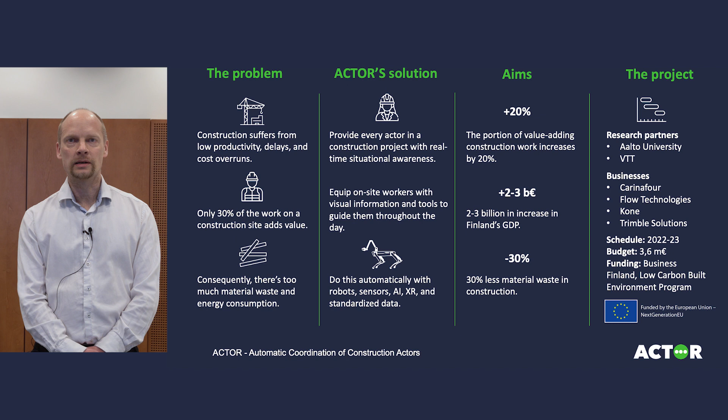Our approach is improving real-time situational awareness by using tools like robots, sensors, AI, XR and standardized data. The solutions you are going to see today from the company partners include solutions related to logistics, smart elevators, and recording site flow, scheduling systems, and solutions related to robotic automatic data collection. In addition to this, we have a lot of research coming up, but we will have separate events to discuss our research results. Welcome and enjoy.

Could we reach the same level of material management as the shipbuilding industry? Ari Viitanen of Carinafour explains how to automate the material management workflow with their CALS platform.

In the ACTOR project, we research and develop further our CALS material management platform. So if we looked at what CALS is actually about: first, in the first box, we are collecting the construction material part lists. We can take it from the BIM model or we can take it manually from other sources. So there we are getting this space-specific part list.

Next thing is that we are connecting the part list to the schedule, so work planning or the project planning. After the second box, we have the scheduled part list, which is actually demand. It means that we know what materials are needed, when they are needed, how many are needed, and where they are needed.

Okay, now we move to the third box where we are doing the supply chain integration. There we are sharing the forecasts, running the material call-offs, and getting the material confirmation from the network. After the third box, we know that we have the material availability.

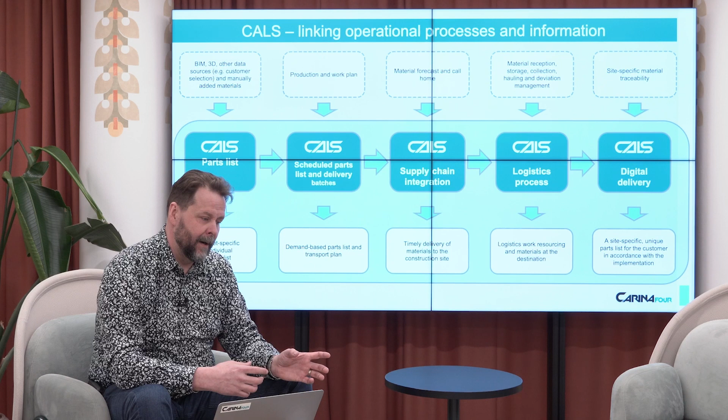After the materials are delivered and everything is installed, we have collected the deviations and run the continuous improvement. So after the whole process, we are able to do the digital delivery. This means two things: we can deliver to the asset owner which materials have been used in the project and in which locations, and we know the process, how we have delivered, how we have defined, how we have run the logistics. So we have this as-built logistics model as well, and from the logistics process model, we can utilize it to further develop the whole process.

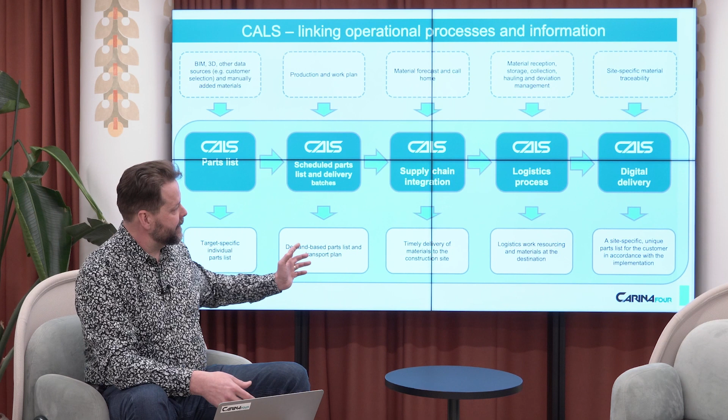In ACTOR, the main focus was how to automate the information sharing. Today, we are doing all of this with emails and telephone calls, and the digitalization utilities - how we are using the digitalization - it's a very low level today. But in the future, time to time we still need a telephone or emails...

...but the idea is that the material management will be on a digital platform, we have the data, how to develop the system further, how to be better tomorrow than we were yesterday. And that was the aim: standardize, stabilize, automize. And that's CALS 3.0, what has been researched and developed under ACTOR. Thank you.

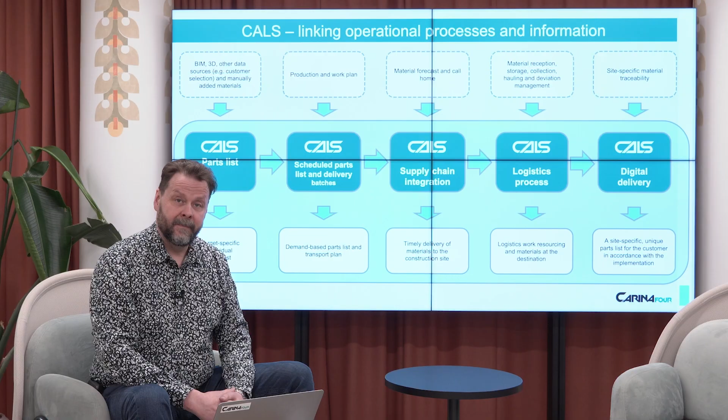How could elevators be used for construction management and optimization? Let's watch a video by KONE about SiteFlow, a digital platform providing that capability, and then Ulla Tikkanen will elaborate on the benefits of the solution.

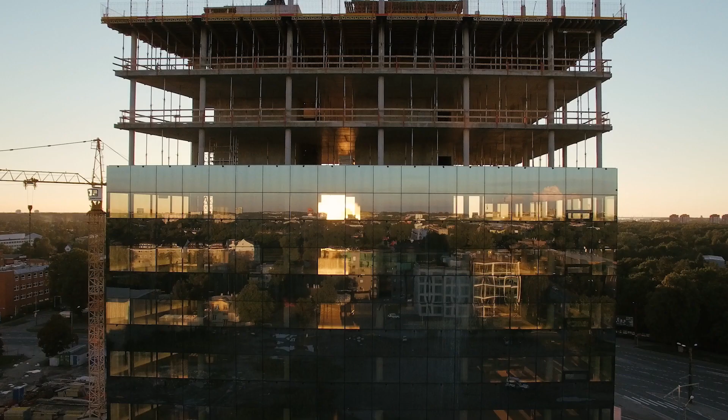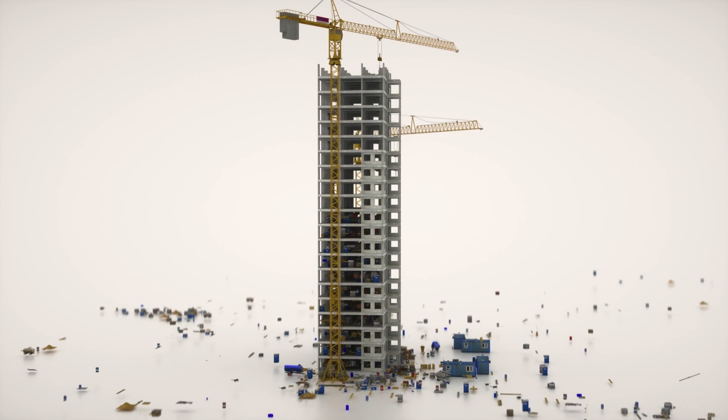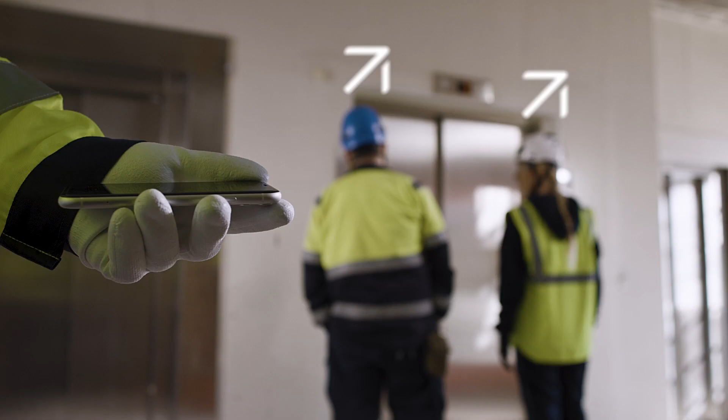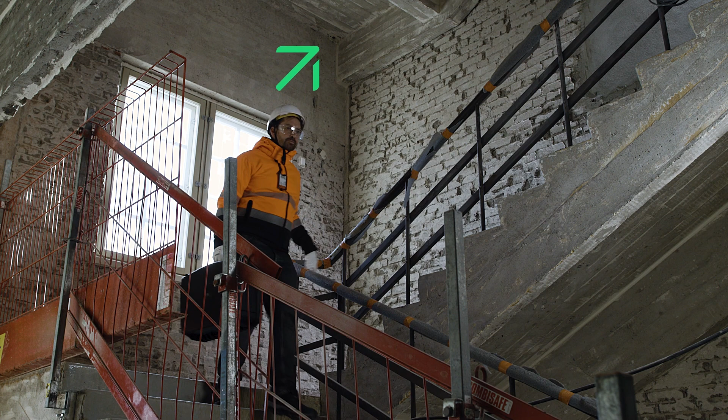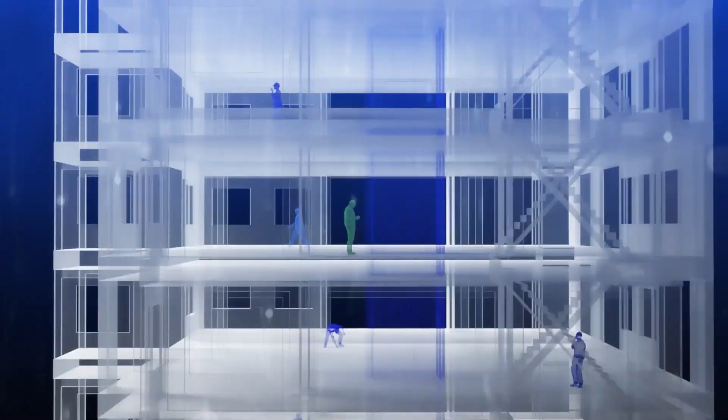Get up and go with KONE SiteFlow. Manage and monitor your elevators remotely - that means instant insights anytime and complete control anywhere. Permit or limit floor access in line with the latest on-site developments. You can even prioritize the elevator for the most operation-critical workers, allowing them over 4 times faster service. Quickly identify and fix any issues with the help of AI and real-time notifications. Share information and updates with everyone via the KONE SiteFlow app.

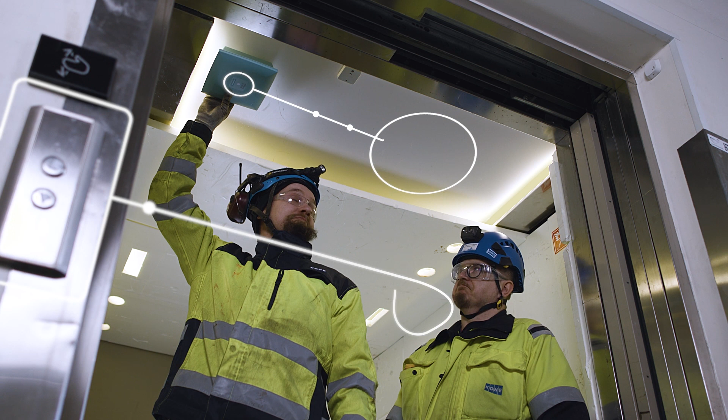Get people and materials to the correct floor with minimal hassle. So, how does it work? We use RFID data to enrich elevator, people and material flow data, combined by advanced AI technology. Over time, KONE SiteFlow calculates how to best optimize the system for your site's specific needs. The installation is simple, requiring only helmet tags. Attach, scan and go - we'll handle the rest.

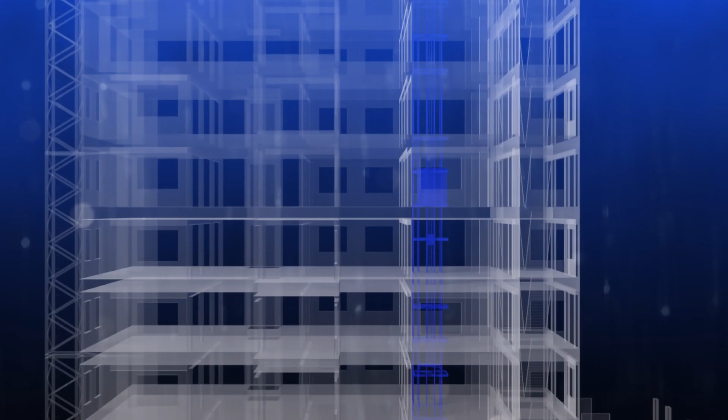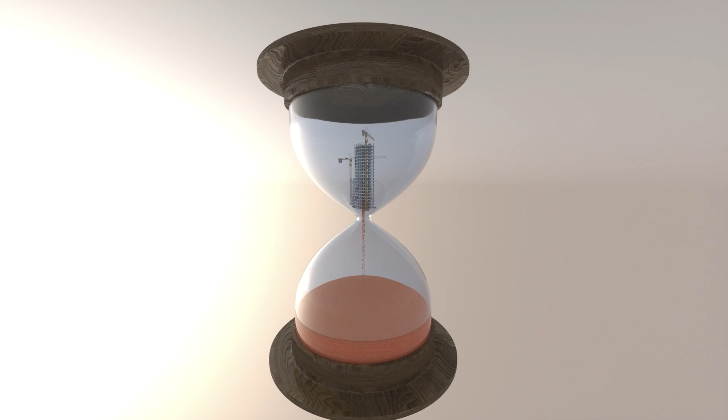KONE SiteFlow provides actionable insights to increase site productivity. It equips you with the tools to fully control elevators during construction. Detect and react to minor issues before they become major problems. With its help, you can cut back on the productivity cost of all the little moments lost. A 2-minute delay here, a 5-minute wait there, adds up to hours upon hours across the lifespan of a project. And that's just for one single worker. KONE SiteFlow, giving your efficiency the lift it needs.

To conclude and to align with actor goals, I would like to mention four things. By integrating KONE construction time elevators as part of your vertical site logistics, you can save up to 46K per month per elevator by moving workers and materials faster.

Secondly, our digital solutions can help maximize elevator logistics capacity, both KONE elevators and traditional construction hoists. According to studies conducted with our partners, digital tools can significantly reduce time spent looking for tools and equipment.

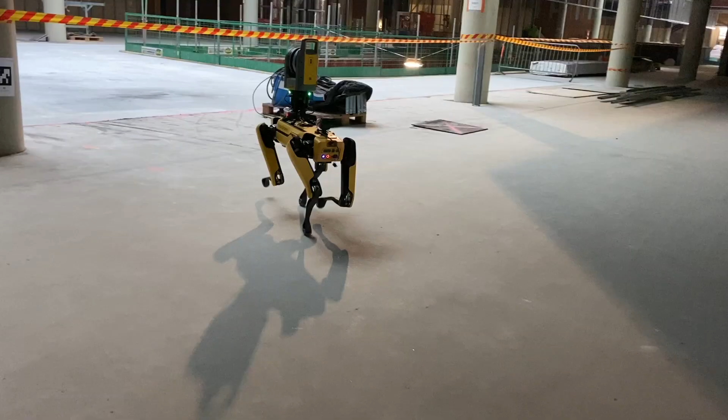One of the use cases for robotics in construction is data collection. Kim Nyberg of Trimble discusses automated data collection and digital collaboration boosted with robotic technologies. For the last couple of years we have been working on the Actor project, trying to get robotics into work sites. Trimble has been focused on automated data collection.

We have been using the Boston Dynamics Spot robot, which we have equipped with 360 cameras and laser scanners, LiDARs, and so on. We also developed remote operation software for remotely controlling the robot using a web interface, which means we can control a robot anywhere in the world just using a browser.

In Finland, we have been focusing mostly on the construction industry, and our international tasks have been focused around mining. Another aspect we have been working quite heavily on is real-time collaboration.

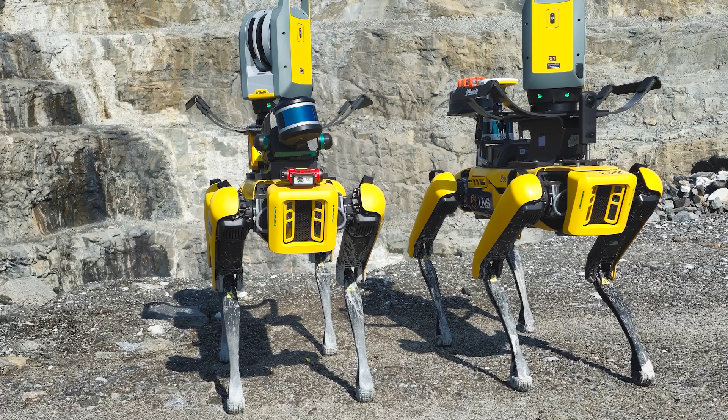Once we get the data from the field into our system, into Trimble Connect and Tekla Structures, we have enabled something called Trimble Live Sharing as a backend solution and live collaboration, which allows for real-time collaboration around the model, avoiding meetings to talk about clashes and instead solving them in real time. Of course, these changes can then be sent back to the field as well.

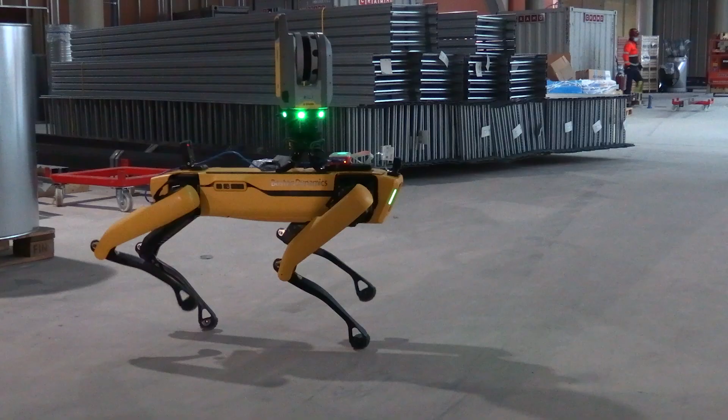One of the many things we have done is utilizing GNSS, that is GPS hardware, so that we can plan missions outdoor using Trimble Maps. An operator can sit at an office, plan a site visit, and then anyone who can drive a car can take the robot out on the site, press a button on the mobile phone, and the robot will autonomously walk the predefined mission and collect the data, either using 360 imagery, LiDAR, or point clouds.

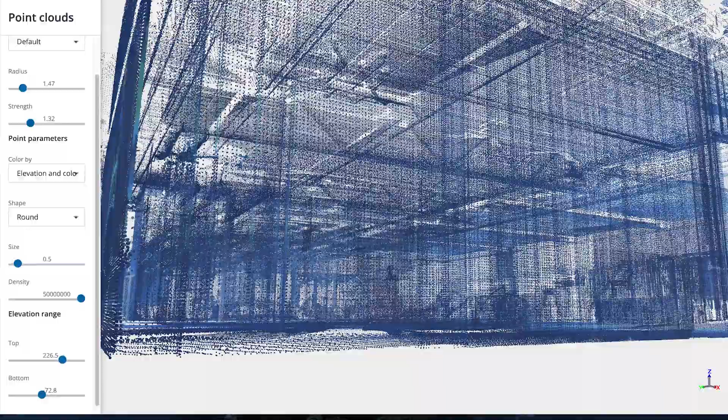Once it's in Connect, we have software that can automatically classify the material, align it automatically, and from that we can do modeling either based on the point cloud or automate the process. This enables automatic collection of data and a better situational picture for the construction companies.

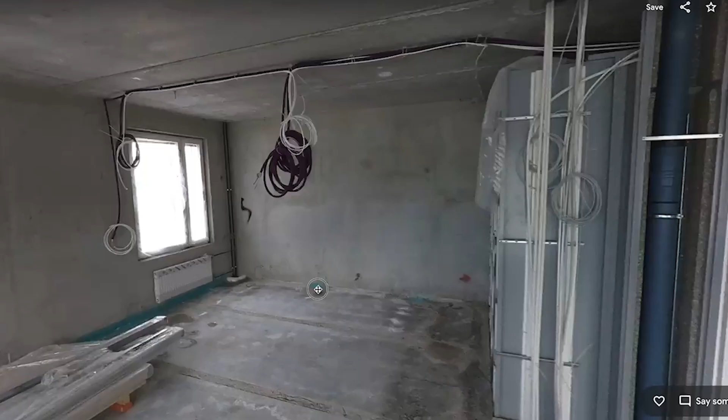We have also worked with XR hardware. We have tested the Varjo XR-3 for data collection, and various headsets for immersing yourself in 360 images. We have even tested controlling the robot remotely from within a headset, so you can immerse yourself really in real time and see a live video feed from the construction site, even if you're in another country or another part of the country.

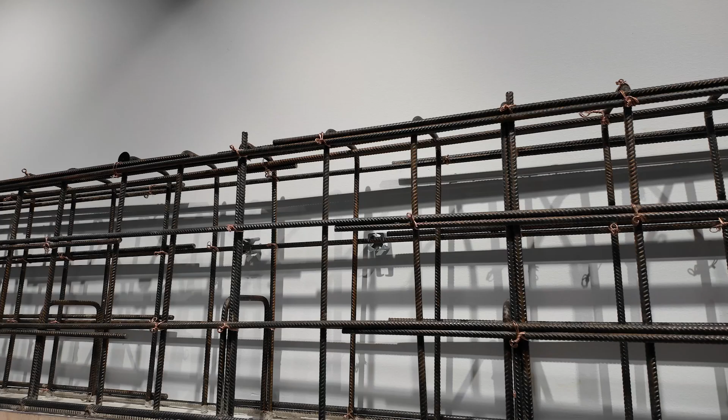This really reduces things like travel, so it reduces CO2 emissions. We can get experts on site without them actually having to physically be there.

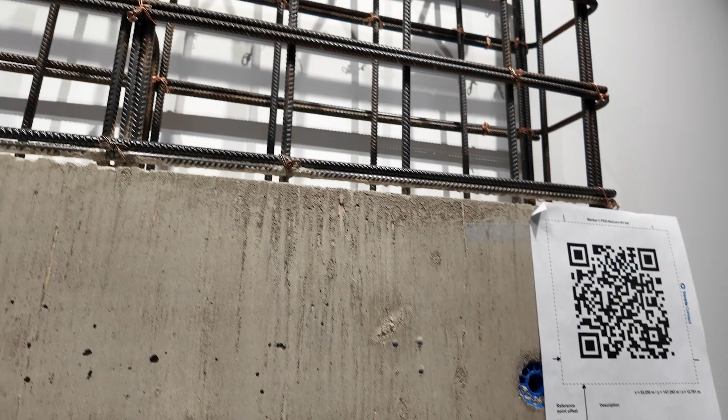On the autonomous exploration side, we have been working with XIN Technologies. They have a rotating LiDAR system that can create almost real-time point clouds. One of the world firsts done during the Actor project was scanning a multi-story parking garage in just about 10 to 15 minutes, something that traditionally would take hours with traditional methodology.

Digital twins of buildings have been in the headlines for many years, but can you imagine a digital twin of a construction project? Our last presenter, Tomi Pitkäranta of Flow Technologies, explains what their company has done in Actor to achieve this goal.

Hello, and welcome to this webinar. My name is Tomi, and I'm here to present our results. But first, a bit about us.

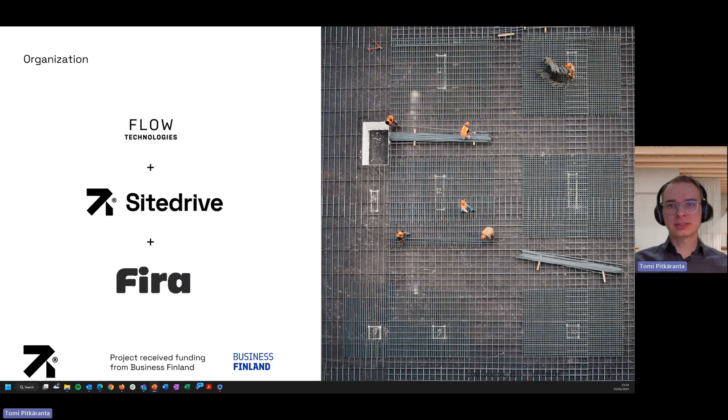Our Actor project team consists of members from Flow Technologies, which is our parent company, SiteDrive, our construction software company, and our affiliate entity, Fira, a general contracting company operating in southern Finland.

Our objective for the project was to define how a digital twin of the construction process can, A, improve site productivity, and B, support development of a construction production system. This project was done in 7 work packages.

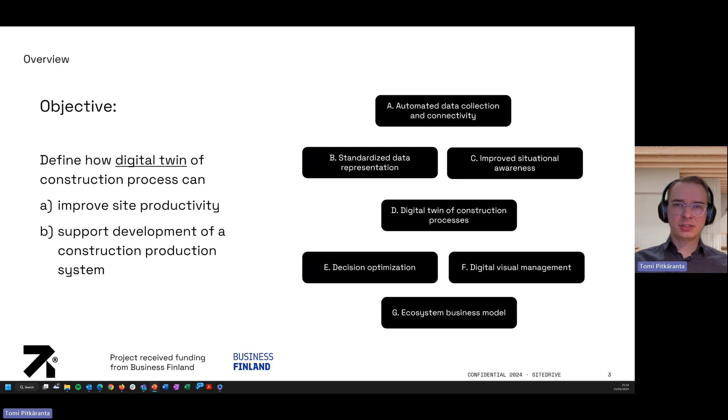Each work package had its own results about understanding the current state and defining a method for the optimal state. Here I present a brief summary of the whole results.

First, we learned about how to capture the relevant data from the site, and then to understand how to use this data for the production, and also how to visualize it to help the production.

The huge thing in the project was to understand how to actually manage all the information related to digital twin of construction processes.

Additionally, here in work package D, we developed a method for automating production planning based on design.

For work package E, it was all about understanding how the site should be managed, what structures there are, and who will be making these managing decisions.

In visual management, we focused on enhancing the communication of tasks and about tasks, so what to do and how to communicate that information.

And finally, in work package G, we defined a model for how to achieve a win-win situation between the general contractor and subs.